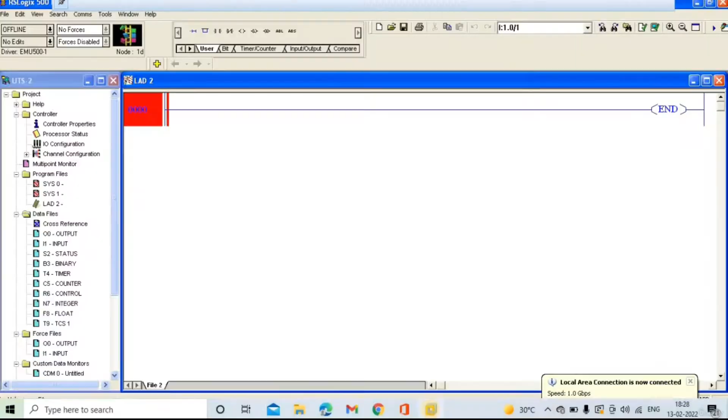In this session, we are going to discuss the ladder logic rules, or simply we can say ladder diagram or ladder language rules. So why are these rules important to know? Because if you observe all the PLCs available in industrial automation, like Allen Bradley PLC, Siemens 300, 400, GE Fanuc, Omron, Delta, the common language in all these PLCs is nothing but the ladder diagram.

Along with the ladder diagram, we use some other languages in some PLCs, like function block diagram, sequential function chart and structured text language. But in most cases, the most favorite language which we use in all the PLCs is nothing but ladder language, or we can say ladder diagram.

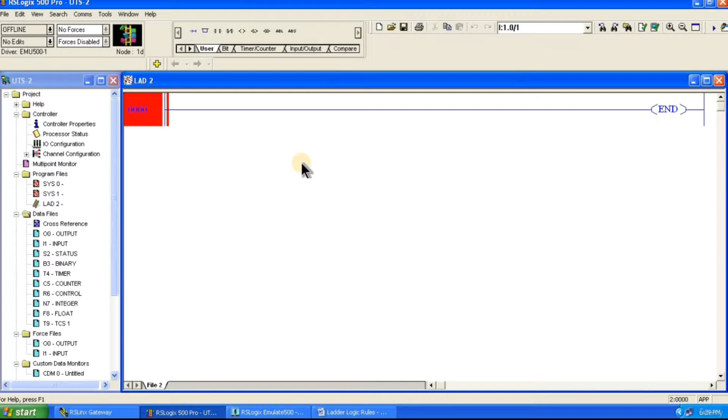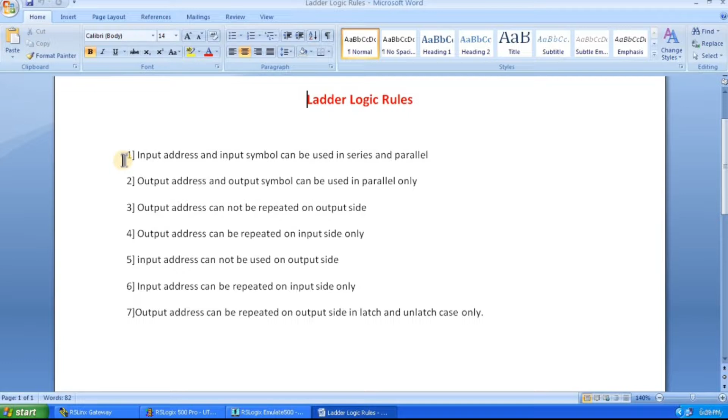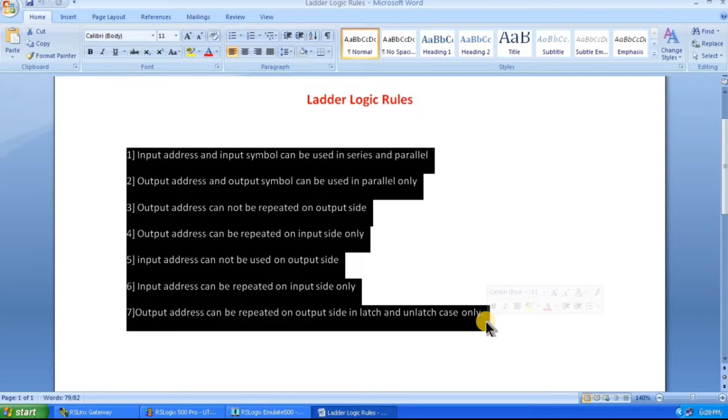So in this session, we are going to learn the rules which are essential to learn this language. Here you can observe 7 different rules. I'm going to tell you the meaning of each rule in terms of ladder diagram, so that you are able to understand the meaning of each rule properly. Now let us start with the first rule.

The first rule is that the input address and input symbol can be used in series and parallel. Simply copy it and paste it. Click on edit title and paste your title here. Click on OK. Now this is rule number 1.

As a programmer, you should know some basic parts also. Here you can observe some symbols: the rung, branch, normally open contact, normally closed contact, output coil, latch, unlatch, and some other instructions. In an upcoming session, I will cover the meaning of all these symbols properly.

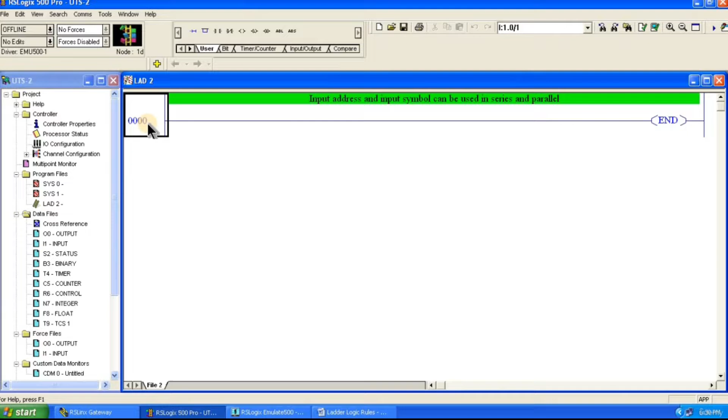See here, I have provided the title. Now, if you want to select the symbol on this horizontal line, the rung, simply select it. Once you select it, its color will change. Now the color is red. Let's select the normally open contact. I have selected the normally open contact, but you can see the problem here.

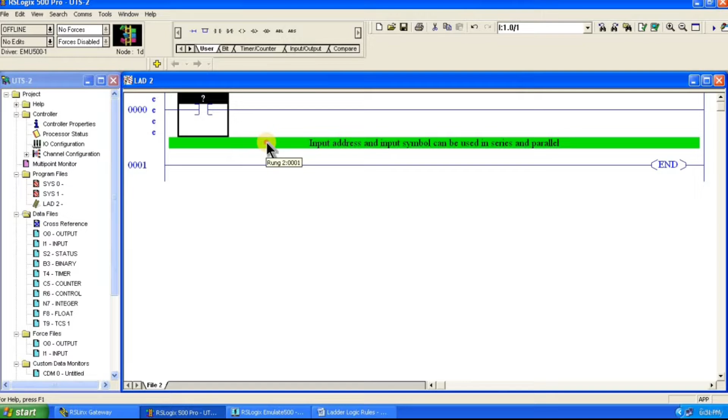So in order to avoid this problem, if you don't want the name below the rung, just delete it. Initially you have to select the symbol on your rung, then you can provide the title like this. Easy, right? Now let us understand the meaning of this first rule.

It means the input symbol and input address can be connected in series as well as in parallel. On your left side you can observe only the input symbols and input instructions, and on the right side of the window you can observe the output instructions, output coil, and output addresses only. Some other parts are also given here which we are going to learn step by step.

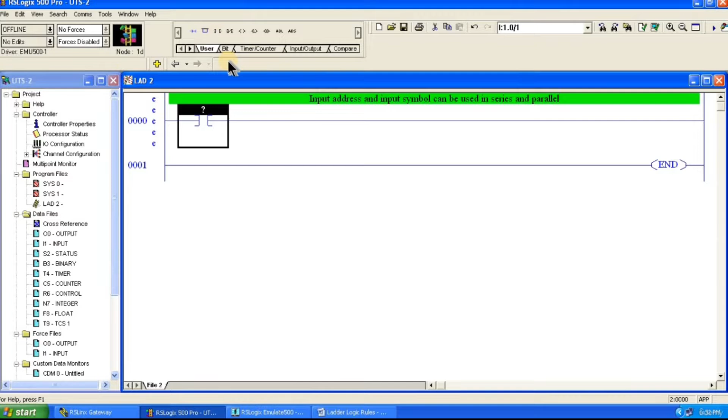Initially I have selected the normally open contact, then I'm selecting one more, because we can connect input symbols and input addresses in series as per our requirement. So I have selected 2 inputs in series, and if I want to connect one more input in parallel, how can I connect it? Here you can observe the branch. Select the branch.

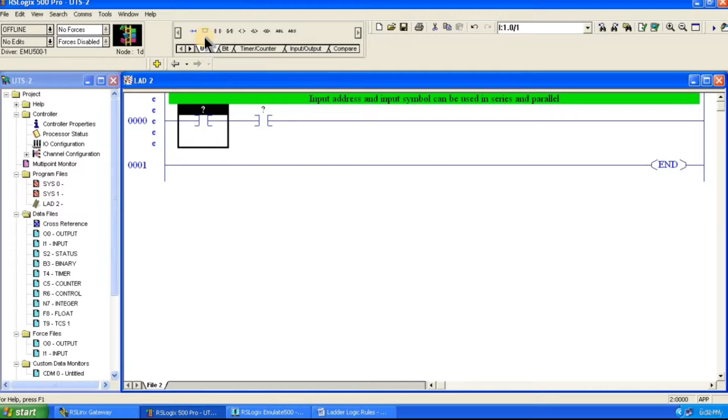But before that, make sure you select the symbol to which you are going to connect the input in parallel. So here I have selected the symbol, select the branch, select this red part, drag it to the left side and drop it. Select the left corner and select one more normally open contact. As per the requirement, you can go with the normally closed contact also.

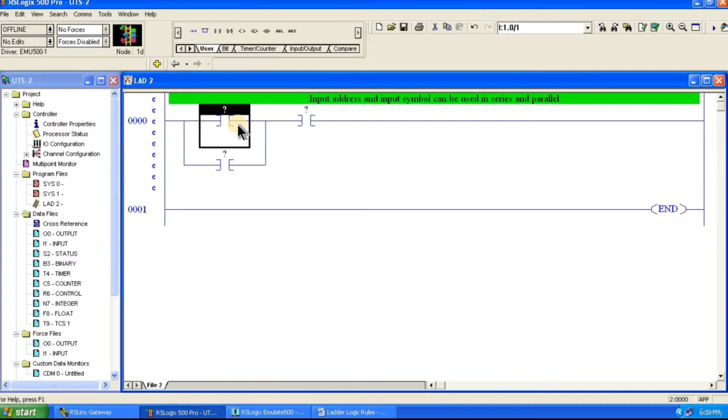The normally open contact means you can think of the start button or start switch, and the normally closed contact means the stop button or stop switch. Now I want to connect the output coil here. So I have clicked on this symbol, then selected the output coil.

According to the first rule, we have connected inputs in series, meaning these two inputs are in series, and one input is in parallel. Likewise, if you require a few more inputs, you can connect them like this, in series as well as in parallel.

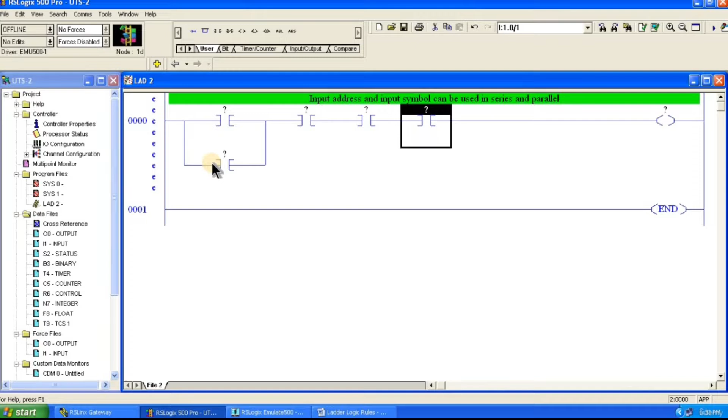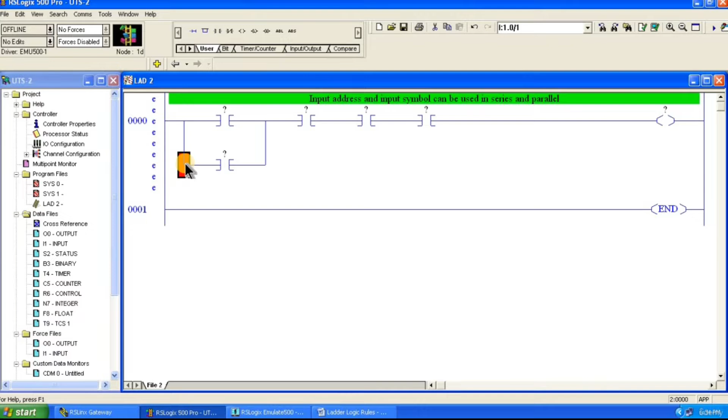In order to connect more inputs in parallel, don't select the branch again, because you will not be able to connect the inputs properly in parallel; the alignment will not be proper. So simply click on the left side, press Ctrl C and Ctrl V like this. In this way you can connect a number of inputs in series and in parallel. Now I am deleting some inputs like this.

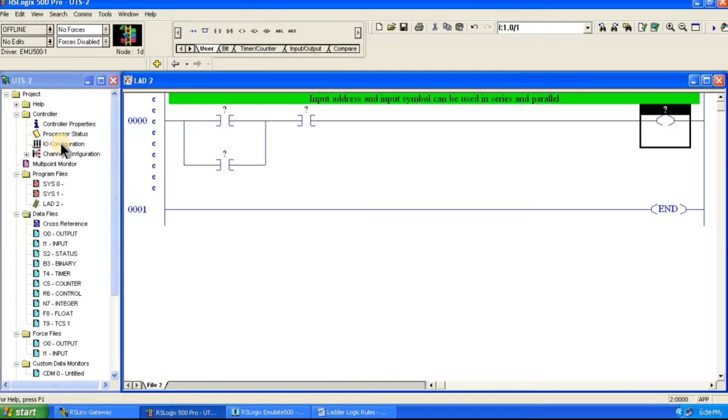Here, if you want to provide the address, how to provide it? In the previous session, we have already discussed addressing. So I'm just going to show you some part again. Here you can see, we have inserted the digital input card in slot number 1. So as per slot number 1, we can provide the input address.

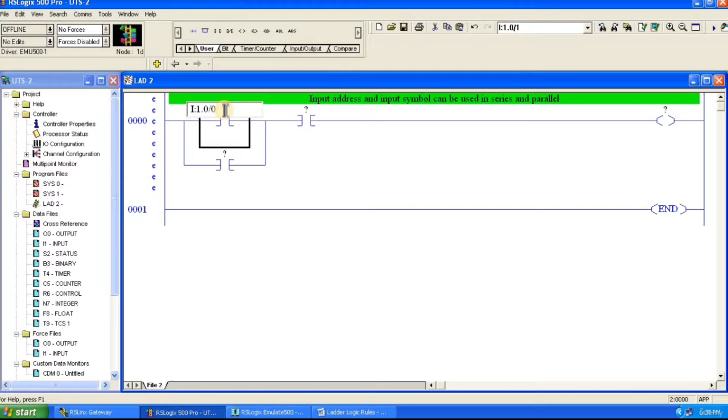Simply double click on the question mark, type the address I:1.0/0 and press enter. Now you will get a pop-up window in which you can provide the name. So here I'm providing the name like toggle switch number 1, and if you want to provide a description for the same symbol, you can provide it.

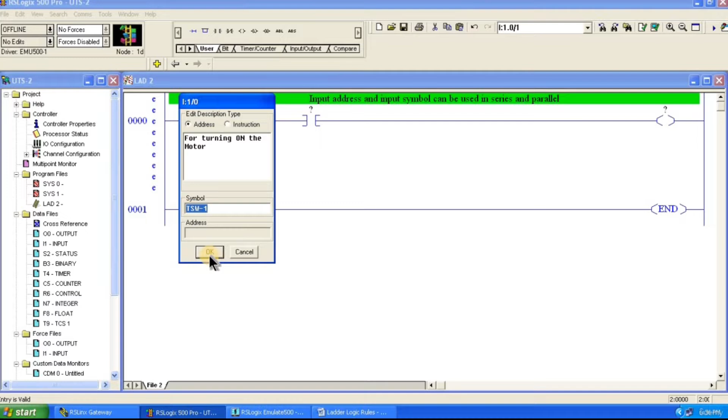For example, I'm using this toggle switch for turning on the motor, like this. I click on it. Now here you can observe the problem: I have added the name toggle switch -1. The dash is not allowed actually. Simply type it like this, toggle switch 1, then press enter. Now you can change the description and the name of that particular symbol as well.

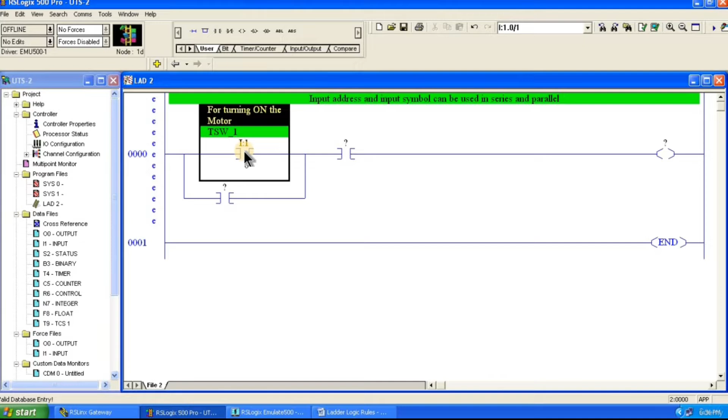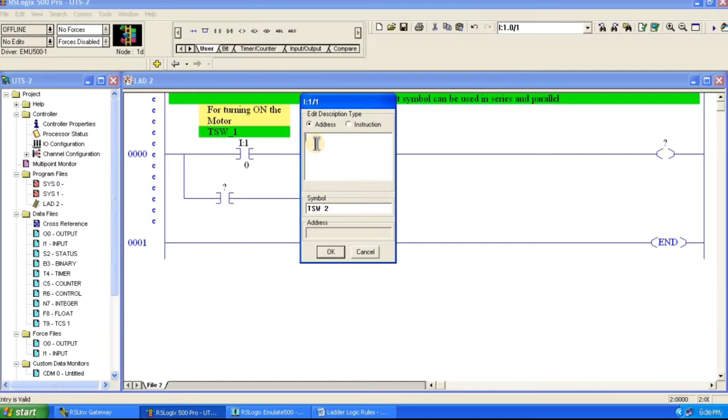Now similarly, you can type the address for the next normally open contact, I:1.0/1, press enter, toggle switch 2 for the symbol, and we are using it for the same. Now, if you don't know how to provide the addressing, simply refer to the data files here. Click on the input data file and simply drag and drop the address like this. Here we have already used these two addresses, right?

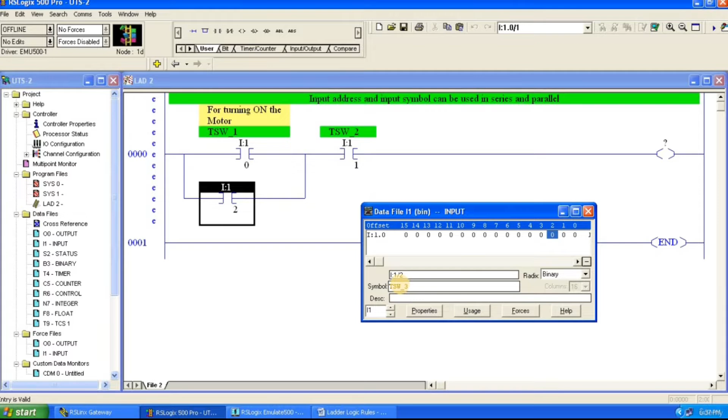If you want to provide this address, simply hold and drag; you can see we don't even need to type the address, simply drag and drop. And if you want to provide the name or description to this symbol, you can provide it directly from here also, toggle switch number 3. Press enter like this. It's very simple. Similarly, you can provide the output address also.

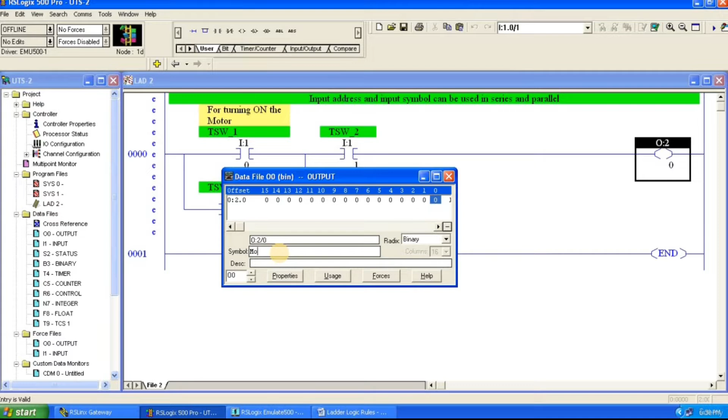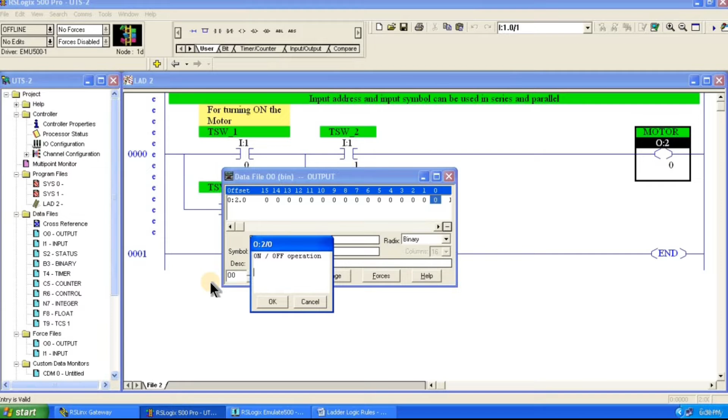Either you can type the address like O:2.0/0, or you can drag the output address. So double click and drag and drop the address like this, and provide the name of the symbol. Basically this is the motor which we have connected, and the description I am providing is on off operation of the motor, like this. Now this is our first rung.

If you want to check this rung properly, I will show you in the upcoming session. Initially just understand the meaning of the rung of the ladder language. In this case, to turn on the motor, you have to press two switches, switch 1 and switch 2, then you can observe the on-off operation of the motor. And you have a second choice, switch 3 and switch 2. At a time we need to press two switches to turn on the motor.

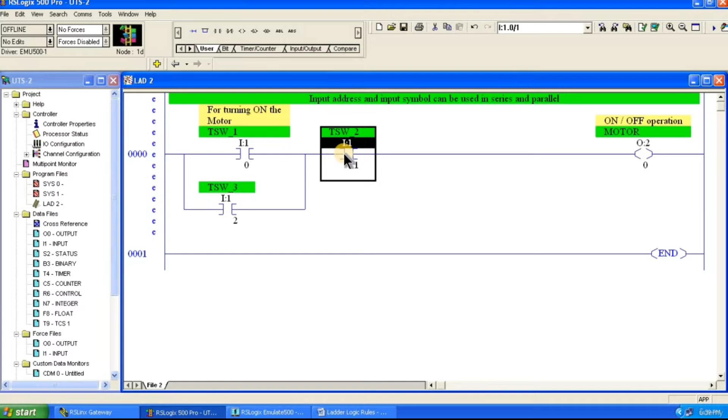Now coming to rule number 2. In rule number 2, the output address and output symbol can be used in parallel. For example, if you want to turn on one more output using the two inputs, either switch 1 and switch 2 or switch 3 and switch 2, what do we need to do? In this Allen Bradley PLC, we cannot connect outputs in series like this. This is wrong. So we have options.

Simply select the rung branch like this and connect the output in parallel. We cannot connect outputs in series, but we can connect a number of outputs in parallel like this, as many as you require for designing the program. Initially I'm just going to select only one. The rest of the output coils you can delete just by pressing the delete button.

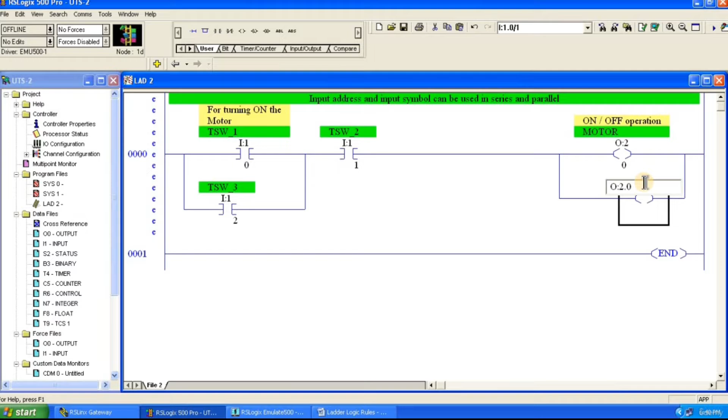Now here, if you want to type the address, you can type it like this: O:2.0/1, press enter. Here we want to turn on the hooter, right, for alarm announcing. Here I am providing the name for alarm. You can provide the description as per your requirement. Here I'm giving for alarm announce.

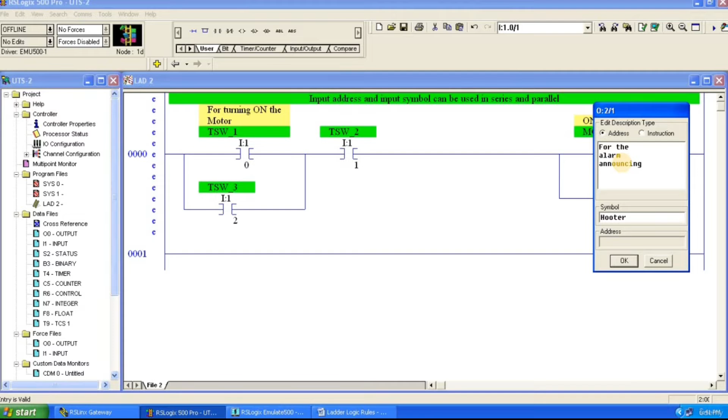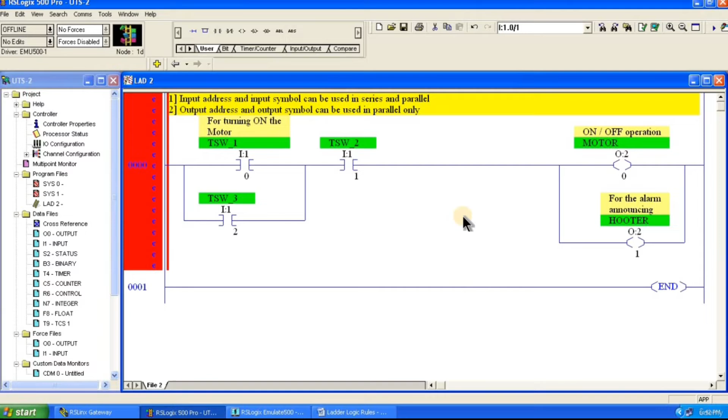Okay. Now, in this way, you can... I'm just going to paste the second rule here, like this, in the rung comment. In this way you can connect a number of outputs in parallel, not in series, because that is not allowed in the case of the Allen Bradley PLC.

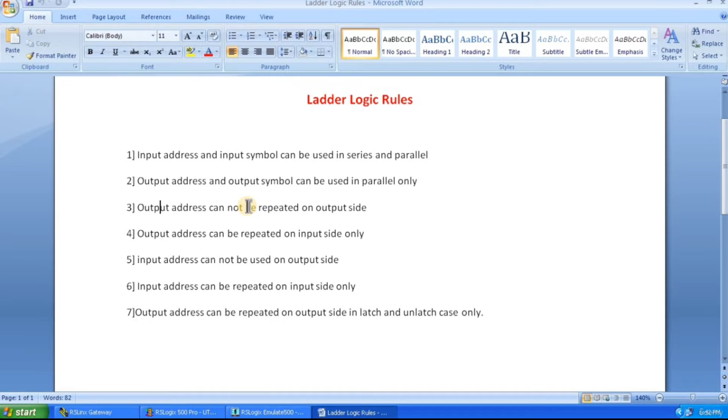Now coming to the next rule. In this rule, the output address cannot be repeated on the output side. For example, here we have provided two different addresses. I'm just going to copy all the content so that it will be easy for us. The third rule: output address cannot be repeated on output side. Here you can check, we have provided two different addresses.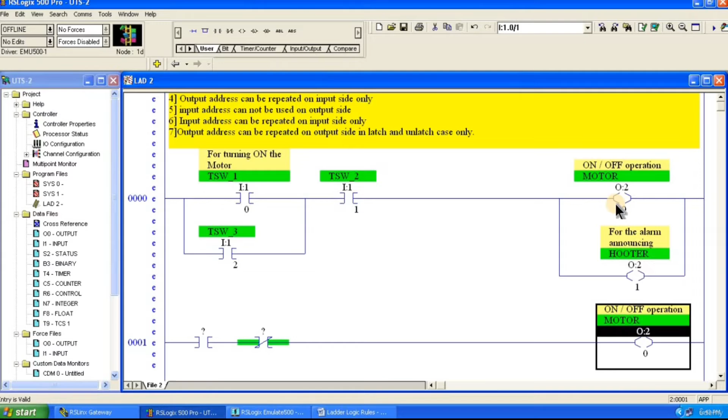For example, if you try to repeat the same address, you can hold and drag like this. Here you have provided the same output address. That is not allowed. Press Ctrl Z. And the most important thing: if you provide the motor address here again, that is also wrong. If you have used the motor address on your output side once, you cannot repeat it again on the output side. That is the most important part to remember. So this is rule number 3.

Now, the fourth rule: output address can be repeated on input side only. Yes, we can repeat the output address, but only in the fourth rule. For example, your task is to turn on the indicator once the motor gets started. How to design the program? As a programmer, we should know these rules in detail. We cannot repeat the output address on the output side, but we can repeat it on the input side. See here, I can provide this output address on the input side to the input symbol. This normally open contact is the input symbol.

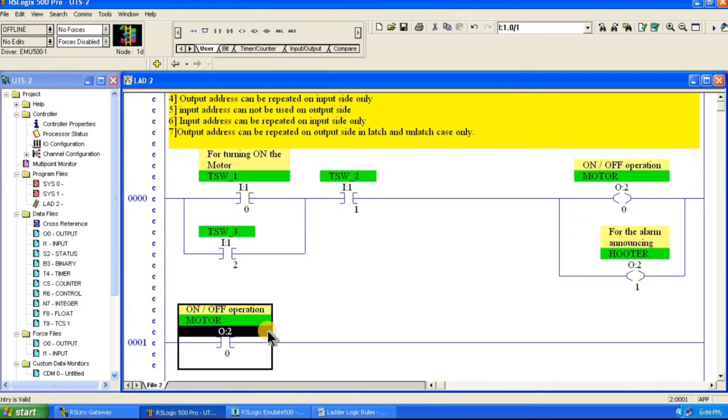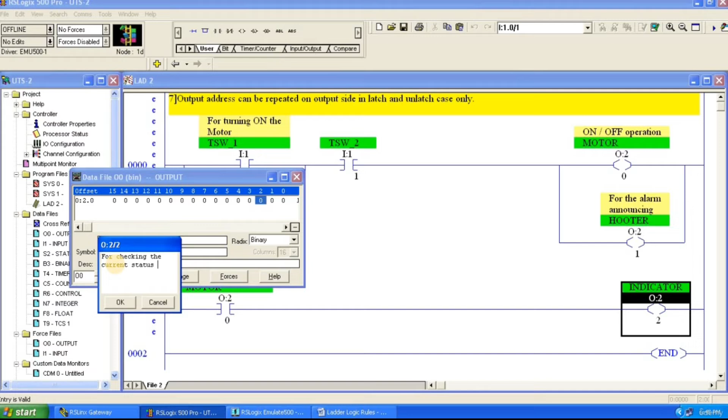Now our task is to turn on the indicator when the motor gets started. Use the output coil and provide one more output address here. This is the indicator. We are using this indicator just for knowing the status of the motor, whether the motor is running or not. And here I'm providing the description for checking the current status of the motor. So we can repeat the output address on the input side a number of times, for example, to execute some other logic.

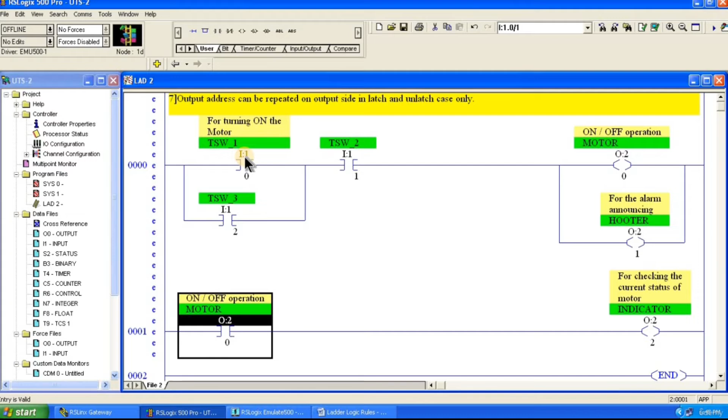Now coming to the fifth rule: input address cannot be used on output side. We can provide the output address on the input side, but we cannot provide the input address on the output side. If someone provides the input address to the output coil, this is completely wrong. Simply use the input address on the left side of your window, on the input side only, and with input symbols. Always remember.

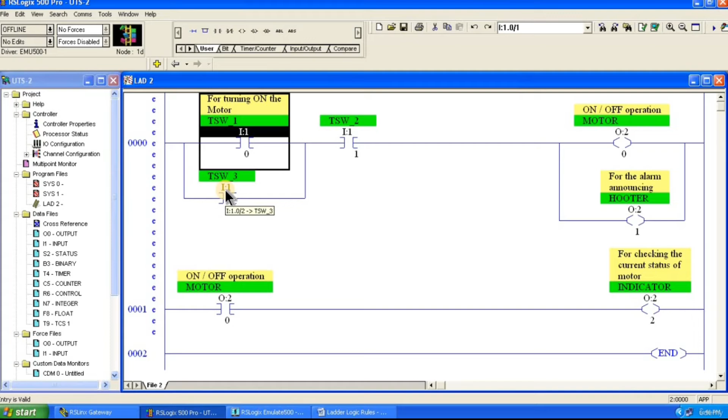Now coming to the sixth rule: input address can be repeated on input side. We can repeat the input address as many times as required, on input symbols. For example, if I want to use this toggle switch 1 to turn on some other output, how do I use this input address? Here I'm selecting one more normally open contact and using this address like this. Likewise, you can repeat the input address a number of times.

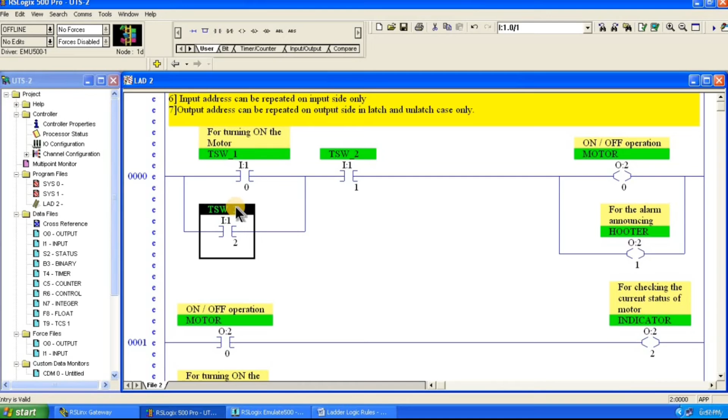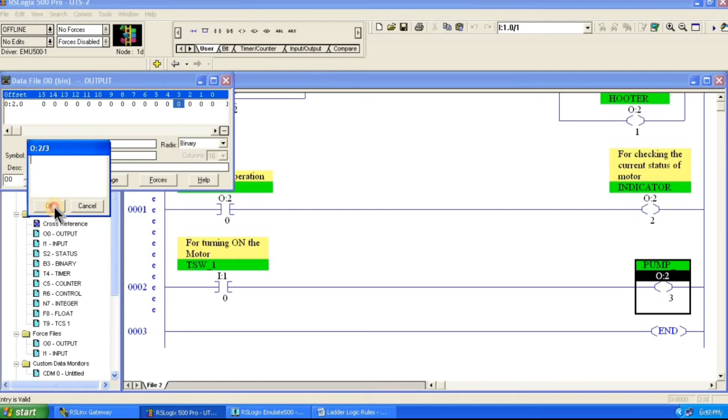Here I'm providing one more output address, the next one is 3, because we cannot repeat that. For the symbol name, I'm providing the pump which we need to turn on, and a description as per requirement. Similarly, you can use toggle switch 2 or toggle switch 3 as per your requirement in the program. Simply, you can repeat the input address on the input side.

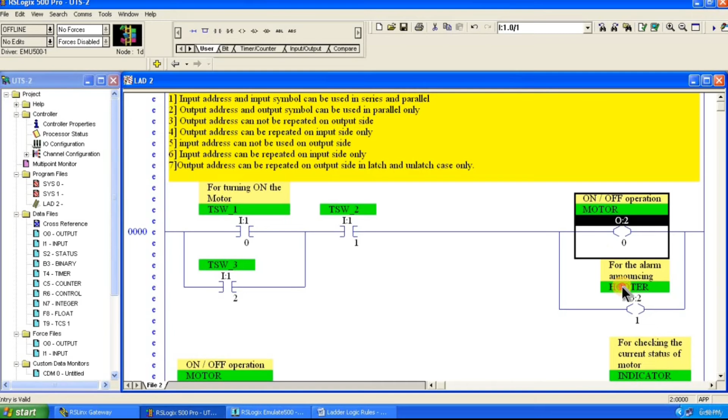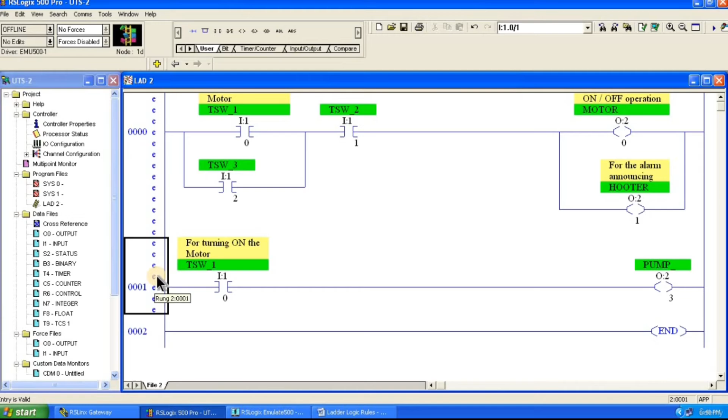Now coming to the last rule: the output address can be repeated on output side in latch and unlatch case. Earlier we learned we cannot repeat the output address on the output side, but we can in the seventh rule only. This is the exceptional rule. Otherwise, we cannot repeat the output address. Always remember. I'm just showing you this rule. Let me delete this part to show you properly. See here.

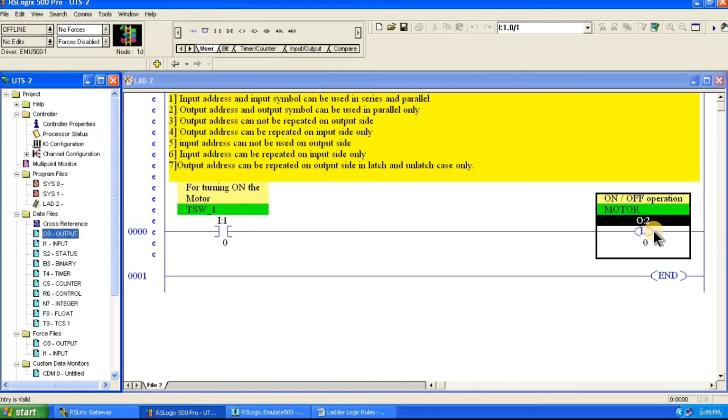Now, instead of using the normal output coil, we need to use the latch output coil. Simply delete this, use the latch output coil, and provide the same address. Here I have provided the address for the latch coil, and one more input with the unlatch coil; the address will be the same for the unlatch.

So what is the latch? When you provide the input to the latch coil, it will stay energized even after you have released the input. Similarly, the unlatch coil is here. Unlatch means what? If you need to stop, if you need to turn off the motor, you require the unlatch output coil, because without using the unlatch output coil, you cannot turn off the motor. That is the reason.

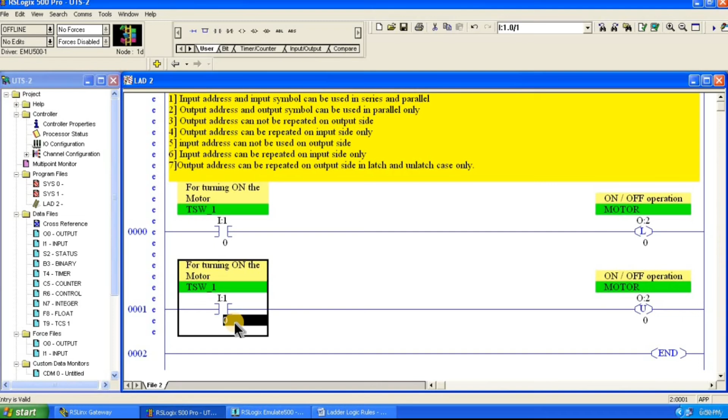Whenever you use the latch and unlatch coils, you must use both output coils in the same program. If you are not using the unlatch output coil, you cannot turn off the program. Remember. So here I am providing one more input. But the condition is that the input should be different. The input should be different.

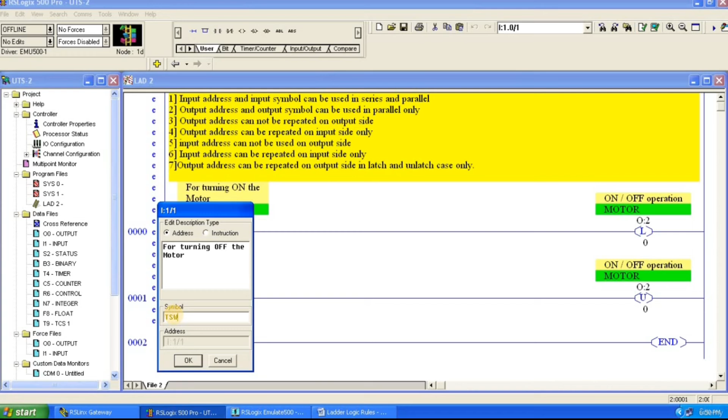Here I am providing the description for turning off the motor. Okay, like this. Now I'm going to show you how to run this program. If you are not sure whether this program is right or wrong, you can observe the two options: verify the file and verify the project.

Initially, just click on verify the file, and in the left corner you will get a notification: the verify has completed and no errors were found. Then in the upper left corner you will get the offline option and the download arrow. Click on the download arrow. You will get three options: go online, download, and upload. Click on download only. In the next session I will explain go online and upload.

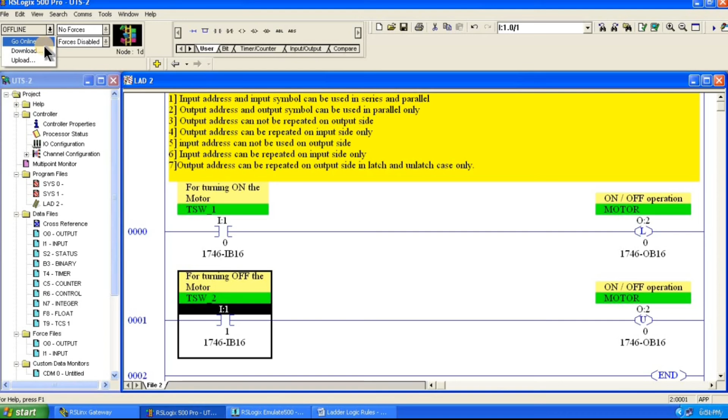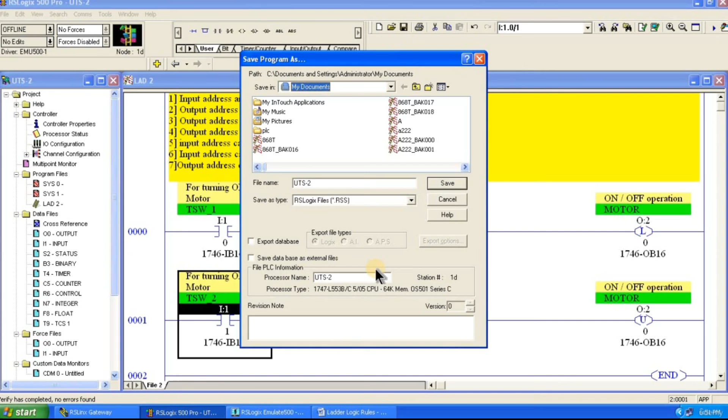Click on download. Now you can change the name of your file. I'm not going to change it, but if you want, you can. If you want to change the location, you can change it from here, so instead of My Documents, you can select a location as per your requirement. Some other things are also given here; you can read them and click on save.

Immediately you will get one more pop-up: do you want to go online? Click yes. Right now we are in remote program mode, and you can observe the ladder rotating vertically. Then again click on the download arrow; you will get many options, but right now just click on run. You will get one more pop-up: are you sure you want to change processor mode to run?

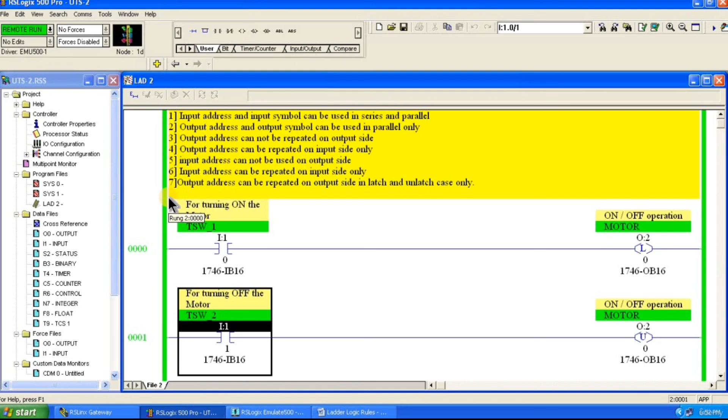Click yes. Now you can check the power rail. The power rail color is green, which means we are in online mode. Green means current starts flowing through your power rail, but in the rung there is no current because normally open contacts are here. So how to examine this normally open contact? If you press the normally open contact, current will flow to the rung, and you can observe the motor turning on.

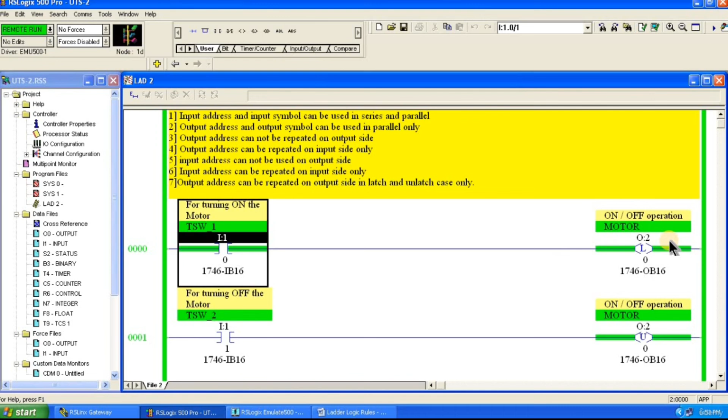When the coil turns green, we can see the motor is turned on. Simply right-click and press toggle. Here you can see the green color, which means your motor is turned on right now. And if you release the start switch, you can still observe the motor staying on. This is possible only by using the latch output coil.

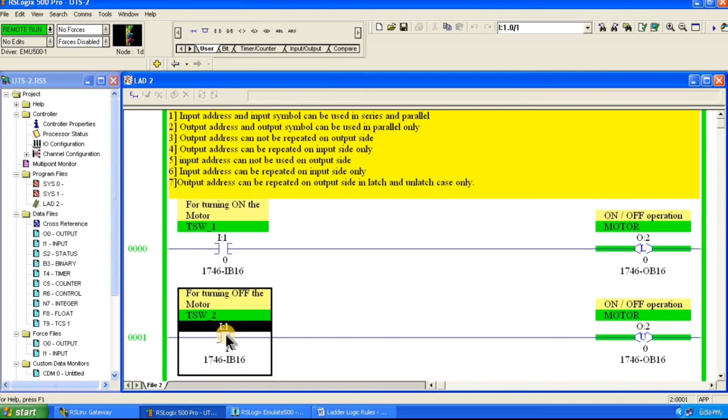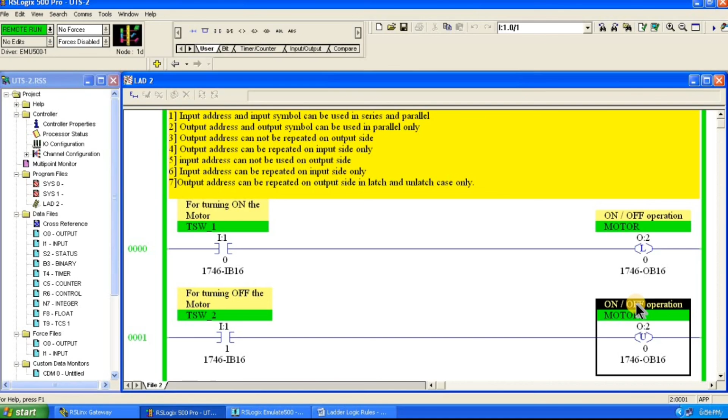If your operation is completed and you want to turn off the motor, simply press this toggle switch and you can observe the motor turn off. This is how we use latch and unlatch for a specific operation. In upcoming sessions, we will design many projects based on latch and unlatch operations. Remember, only in the latch and unlatch case do we repeat the output address; otherwise we do not. So this is all about the ladder logic rules. Next session, we will discuss programs and some other instructions.